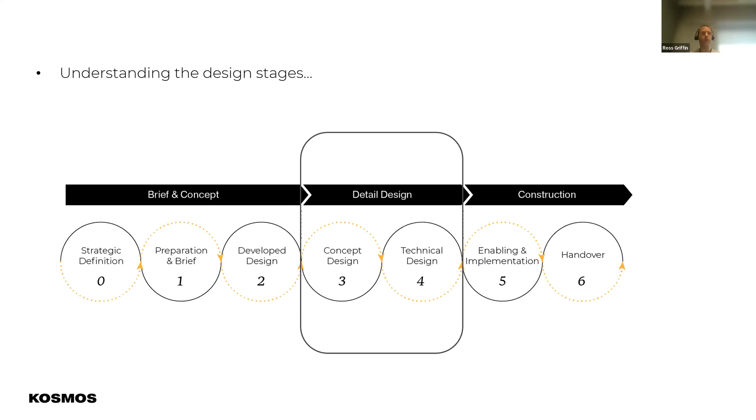So understanding the different levels of information, as we discussed last time, moving along the project life cycle, we now know that the different disciplines deliver their level of detail and level of information at different stages, even though the industry has tried to standardize that LOD 200, 300, 350 at the different stages. The reality is we just don't get that from all of the disciplines uniformly at each of those stages. It's just not possible because the design development of the project doesn't happen that way. We need to let the traditional design evolution develop itself throughout the project lifecycle.

So for us, we need to be aware of what that LOD and LOI is along the different design stages. So again, for mechanical and electrical, we'll jump into this LOD level. For different systems, it is often quite different, because a lot of the mechanical and electrical systems are functional requirements where we wouldn't actually model them, or the design team don't actually model them.

Security might be one example. You might get the location of sensors on ceiling plans, but you're not going to get cables. You might get the location of the security boxes, the fireman's box for fire safety, but they're not going to model the entire system for you.

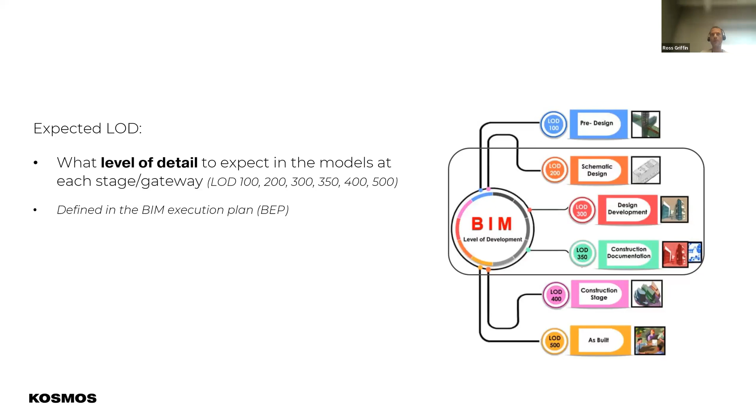You guys are the experts in that. I don't need to tell you that.

So the LOD, as we mentioned before, here we're focusing on LOD 350 purely because that's what's defined for this detailed design stage. If you ever see an LOD 400 or 500 at a design stage, generally the BIM execution plan is wrong - someone really doesn't understand what they're requiring when we talk LOD 400, 500. That's as-built stuff you'll receive from the contractor at the latter end. I'd be interested to hear if you guys have ever come across that on your projects.

In the earlier stages of the development, we've come across it all right, but it becomes pretty obvious pretty quickly that it's not achievable to develop that level of detail, or even necessary.

As parametric design and artificial intelligence come in, I think we'll be able to get this information in our models during the design stage for certain components. But again, a broad brush minimum requirement for all disciplines of an LOD 350 at the end of a detailed design stage - it's not exactly correct. We need to understand that as we develop through.

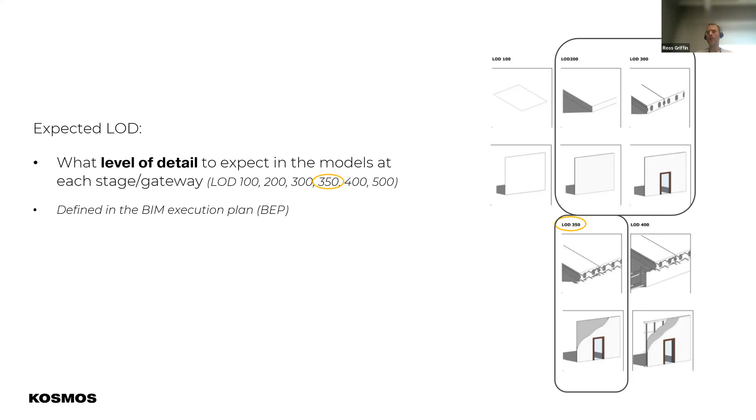And this is the challenge. When you look at all the standards in the industry, no one really explains this to you. This is something we figure out on the projects ourselves. We might understand it from the traditional design delivery model - let's not get terminology confused there, but the design development process - and we need to use those understandings in a practical sense. Like we can't expect more than is traditionally delivered.

Again, same diagram as before. We're looking at different models, unfederated for different disciplines. As we mentioned the last day, you might have a minimum of 5, or as many as 10 or even more. Here we've identified on some projects unfederated models for mechanical and electrical alone - main electrical, fire safety, hot and cold water, ventilation, cooling, foul drainage, external services, all different unfederated models, generally on major projects, more than likely industry, pharma.

You'll get specialist discipline leads developing these systems, meaning more than likely they'll be modeled separately as unfederated. Again, we'll try to understand that in the earlier stages of the project, so that for us at least it's clear what to expect.

And then from here we set up weekly, as mentioned before, or bi-weekly meetings with each of these disciplines to discuss what has been done, what's in the plan. Let's look at the models, quality of information - does the BIM execution plan make sense?

Also, what is ICMS and how do we expect to deliver our cost estimates and cost plans? Often you'll see that the engineers and architects are interested to hear that. Sometimes the structure is different in Ireland - the engineering consultants take on the responsibility for quantification of the engineering elements. I can see that changing in the future.

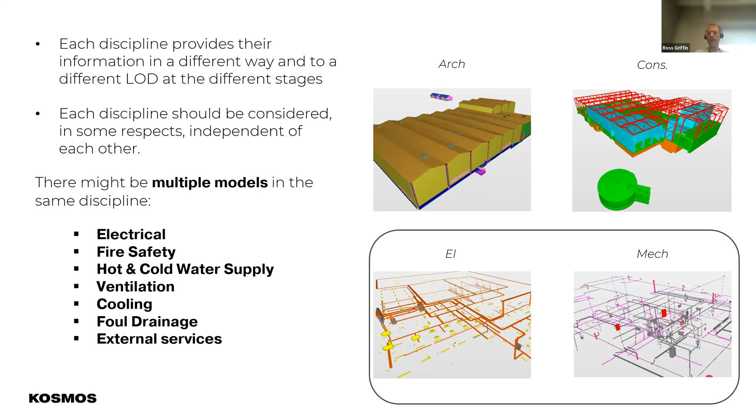And you'll be dreaming about this bloody diagram at night now, you know.

Communication - it's our responsibility to know who the modelers are, because the modelers will be different for each discipline, each organization. It's our responsibility to know who the discipline leads are for each system, so that we can communicate and integrate with those individuals, building that relationship and camaraderie for the project. And of course, the communication flow between disciplines.

In terms of communication, something we haven't mentioned before, and it's not really related to our quantification process, but it's related to the communication between disciplines. And we would expect as QSs to be invited to that communication flow.

If Revit is being used by all disciplines, often you will see that it's BIM 360, Autodesk's cloud-based solution, that is used. There are other platforms out there like Plannerly, for example, that help with setting up the minimum standards in terms of the BIM execution plan management and delivery.

Some of these platforms are super good for setting that baseline of understanding and then managing and developing the design towards that. We as QSs want to be in that conversation. That's not just a design communication flow, that's also a communication flow for us.

So when we're assessing models within CostX or Cubit or whatever, and we see mistakes and errors, rather than filling out our traditional RFI list on Excel, or requests for information, we would open up an issue in one of these platforms like BIM 360 and/or Plannerly and raise that with a particular discipline.

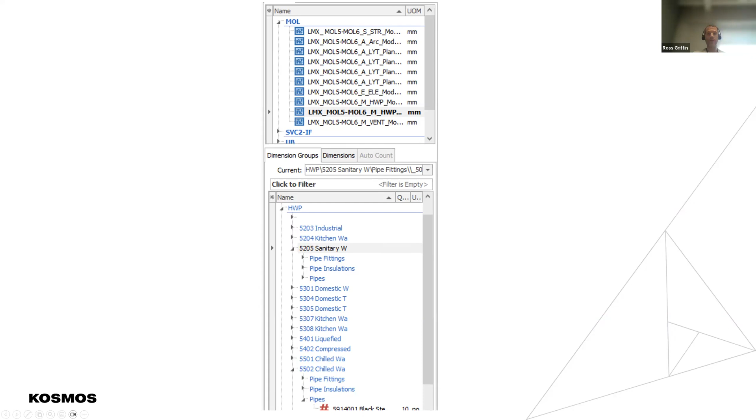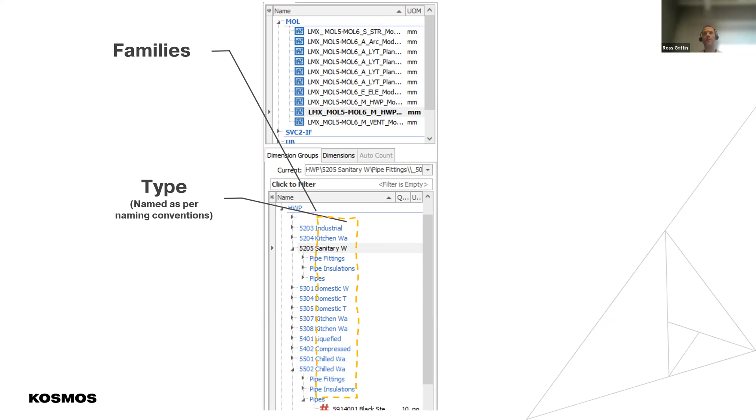You can, of course, go into more detail in the models, but that will depend on what we're looking for. So families from Revit - this is the type in terms of what we're talking about. Reference codes, again, more than likely Uniclass if it's in Ireland and the UK, going forward.

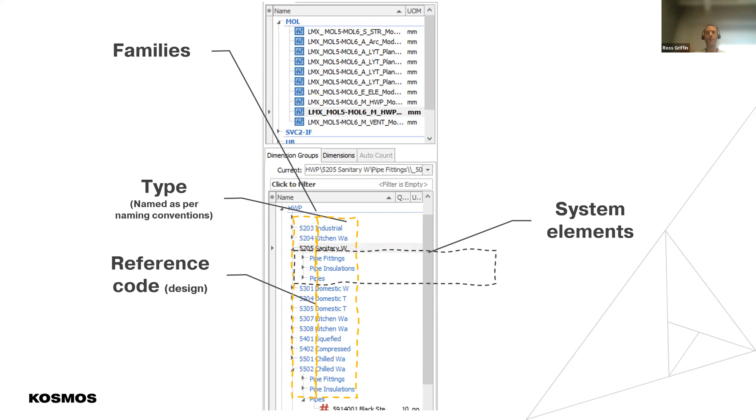There are many different coding structures out there depending on the country, location, and jurisdiction, but the process and principle are the same. On this particular project, we required that the design teams broke the project down into systems, because that's the only way we can understand the total cost of a system, and the only way we can use it for benchmarking in the future. ICMS also requires it, so we'll come to that a little later.

This is just an example using CostX, but you could be using Solibri or Navisworks, it doesn't really matter, the principle is the same. What we're doing is clicking on a system here on the left, and on the right that system is shown. All components, all the children underneath that parent of industrial waste, are shown in the model.

If it wasn't system-based, we would be clicking on pipes or pipe fittings, for example, and it would show all pipe fittings for the entire project, not just the system. This is where systems become important, because we need to know the cost per system, but the modelers don't need to model it that way. I think this is probably the key takeaway for us.

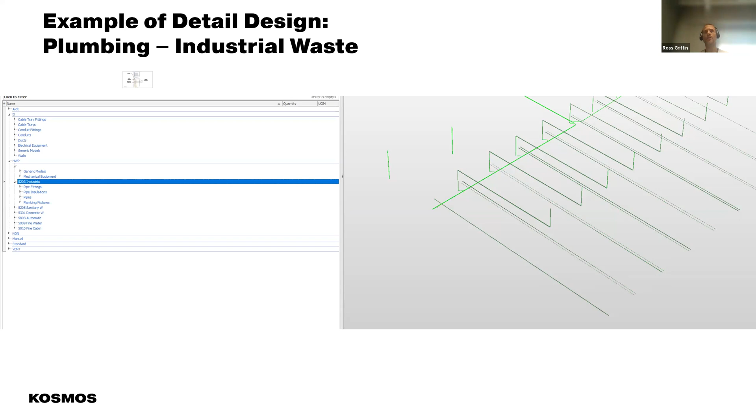When it comes to method of measurement, heights of hangers, all of that stuff becomes a little challenging within the models. You can pull those heights out, but the modelers will not model in that way. Likewise, the modelers will not model hangers, for example. Now with some advancements in design automation, they can model hangers, except for ventilation systems and pipes, so you can pull quantification if the method of measurement requires it. But you need to understand at the beginning how the engineer is going to model, and whether they will model hangers within your distribution elements.

Likewise, looking at sanitary systems, the same principle applies as we go through. What we're talking about here is that now, with a click of a button, we have visibility on systems. Prior to this, we were looking at 2D diagrammatic drawings, and it was virtually impossible to really understand the system. You have your horizontals, but what about all your verticals? They became challenging to understand.

Now, as I mentioned before, we can have really quick takeoff in terms of main distribution elements, main equipment, etc., from the models, with quite good accuracy, as long as we understand the modeling process and that method of measurement.

A small example here would be going to Denmark. They have two standards of modeling. One is they'll model a pipe up to the joint, and the joint, bend, angle or elbow is modeled separately. The other is they'll model right to the center line of the joint, and the bend, elbow or joint is included in the unit price of the pipe. So you have to have that conversation early with the disciplines to make sure they're modeling in the way that you will also quantify.

That might be different here in Ireland and the UK. We'd have to look into that at the beginning, and that's a conversation to be had with the engineers. Also interested to hear your opinion and experience in those matters.

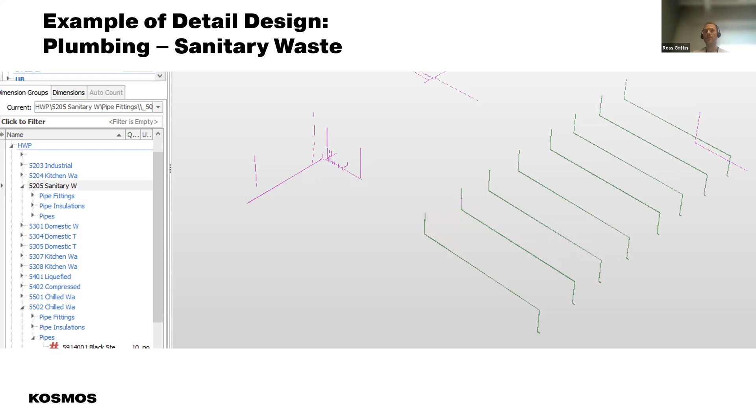Plumbing distribution - of course, the larger the projects, the more complex they are. This is where I absolutely believe that MEP modeling services comes into its own in terms of very quick quantification. You can see it all the way down the left-hand side, relating to the different systems, whether it's industrial pipework, sanitary, domestic water, etc. So we can really begin to isolate these systems and pull data. This is quite a large manufacturing facility, as in this example at the moment.

And then, of course, we have identified in the naming convention the coding number related to whatever coding structure you're using, whether it's Uniclass or what have you, along with the pipe material, pipe size, and system. You get quite a lot of information quickly from the models, as long as the engineers are modeling in that way, all to be defined in the BIM execution plan at the beginning.

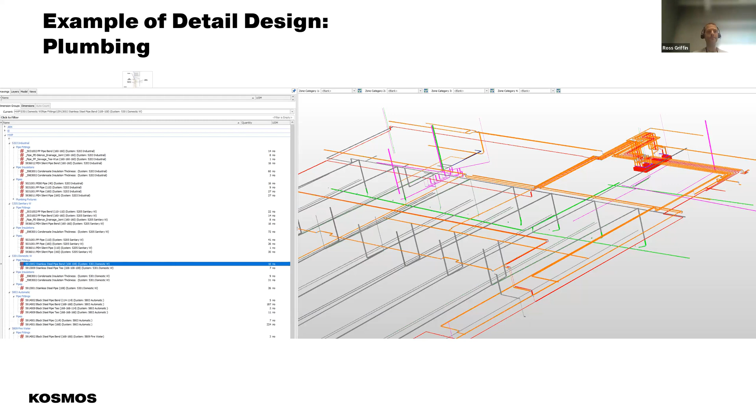Just an example then of ventilation, different approaches to ventilation. We like to look at each individual ventilation system, so that every system under an AHU unit, depending on the number of AHUs you have on your particular project, will give us a very clear understanding in terms of benchmarking and metrics for cubic meter of air exchange per hour per system when we get these prices back from the marketplace.

Another approach is in the method of measurements, where you price each mechanical unit separately, and all your ducting is included for all systems. We'll look at that a little bit later, but we like to look at it system-based here, and the modelers can do that. It's not a lot of additional work for them, because they're modeling each component anyway - they're just allocating it to a system type, and we need to try and define that process at the beginning of the project.

So again, what you're seeing here is on the plumbing element. It's system based, very similar pipes, different pipe materials and sizes used across systems, so they'll be using the same component but just in different systems.

For mechanical here, and the ventilation principles are the same, whether it's a rectangular duct or a round duct. Those material types or component types are shared across different systems. So from a modeling perspective, I think it's not an issue to break these out, just allocating the system.

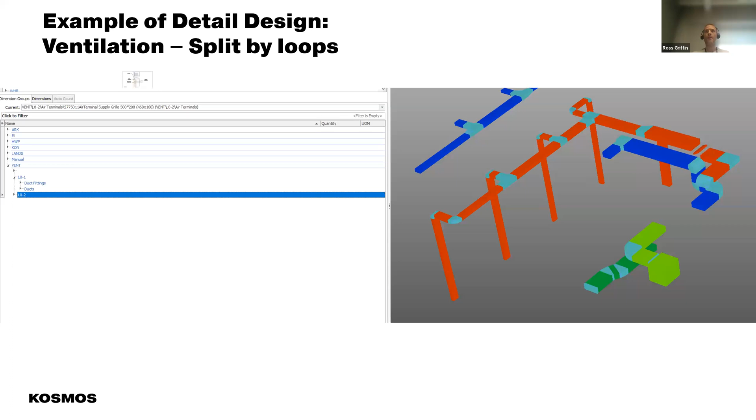And then the electrical. The electrical can vary, I would say, depending on complexity of the project typology you're working on. If it's high-end pharmaceutical manufacturing, you're going to get a lot of electrical cables because they're high voltage, bus bars, etc. For lower complexity buildings - offices, hotels, residential - you're not going to get as much of that modeled. But here you're looking at cable trays, busways, and switchboard units, etc. modeled in the electrical.

And a lot of the secondary fixing will also be modeled, the likes of switches, as I mentioned earlier on, security sensors, fire alarm sensors, sockets, etc. You can actually see down here on the left-hand side what we're looking at. We're currently looking at conduits under the routing, and later along you can see electrical equipment and fixtures and devices, lighting devices, etc. All of that will be modeled, but of course we need to verify the quality of those models.

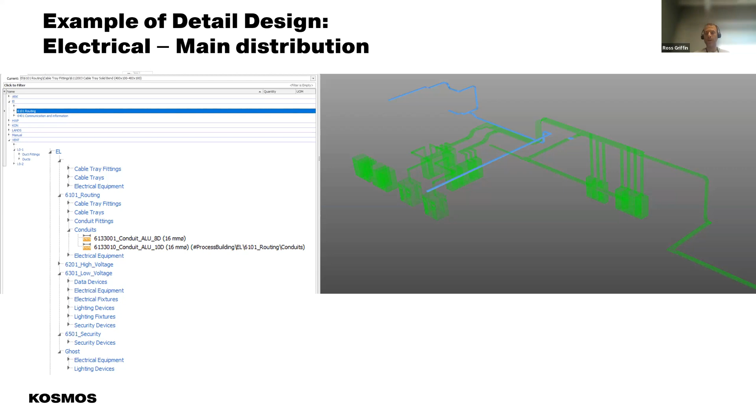Something like in all models, we're going to run into - well, what do we usually come across that becomes challenging for us?

Often we require or suggest that we look at certain elements, and it was the same in the architecture and construction - it's having this conversation with the discipline leads about information that's important to us. So again, drawing tags. Often the tags in the drawings are not the same as the tags in the model, or that reference code. We need to somehow link them, and there needs to be a key within the design information to link it. It can be done in Revit, and that can be embedded on the 2D drawings once they're cut. It's an important conversation to have up front, because this is something that will be challenging over time, I think.

Insulation to the pipes, also an interesting one, as we mentioned in terms of model sizes - a while back, an 850 megabyte model. Once we removed certain parameters in IFC, insulation being one of them, we were able to reduce the size of that model dramatically. And again, other areas like the generic models and caseworks - I have an example of that in a second, I have examples for each of those, of course, like last time.

External, internal - it's not covered under the coding structure used in Denmark, but Uniclass will or might. Client deliverables and underground installations. Underground installations is a bit challenging, as I mentioned the last day, well, I hope I mentioned it.

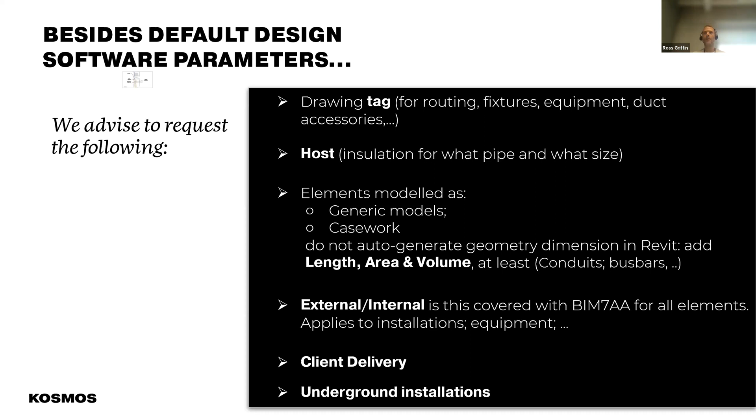So yeah, insulation for what pipe and what size - you can see here it's undefined, but we can bring it in later under our requirements. This is, again, not something we're doing - this needs to be defined within the models. We can't add information to our models if it doesn't exist in the models. That needs to be communicated with the discipline leads and the engineers on the project.

And what's interesting about this is that this is the same conversation we're going to have on every single project. It's the first one that's going to be the most difficult.

And then once we move to our next project, we'll already have the knowledge built up and these conversations already had. You're kind of rinsing and repeating as you go through each project with new stakeholders. It's always new stakeholders, we know that. If you're lucky enough to repeat a project with the same stakeholder group, client, architect, engineer, you're in a good place, because what you all learned in the previous project, you're really just implementing. Some of these conversations you don't even need to have again.

But our experience is that the discipline leads change regardless of whether it's the same stakeholder groups, even on a repeat project. The discipline leads change, the modelers change, people move around the organization. So standardization in communication is ideal, because as the QS you're just pulling that go-to pack and saying, this is what we're doing, this is our standard approach, this is what we want to implement. Have we looked at this? We need to make sure ghosts are indicated like this, and client deliverables like that. Have we got the parameters we need for insulation on the pipes? Yes or no?

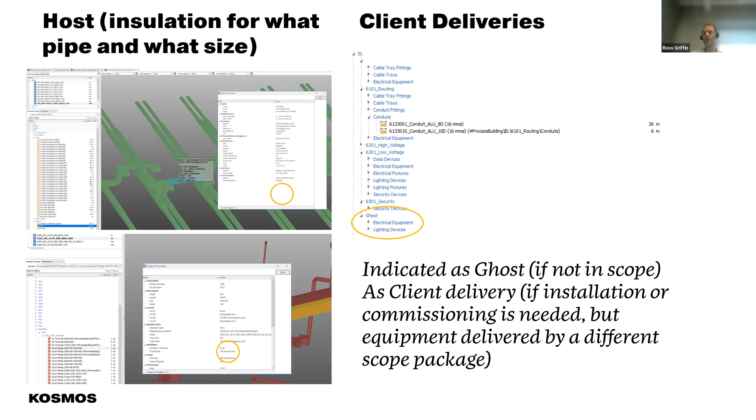So yeah, I think once those first few projects come in, it will be rinse and repeat work, the same way quantification is rinse and repeat, isn't it? There's nothing new in it. Following our method of measurement is a standard approach.

Generic models and casework. An example of a generic model would be the importation of a structural model into an architectural model - that's a generic model. We don't want to know anything about the structure in the architectural model, it's there for placement, we should never measure off that. The same principle applies when you have the architectural model in the services just for locations - we don't care about that, because that model might be out of date. We focus on the model the discipline lead gave us that's most up to date. But getting these elements and understanding them is important.

Generic models and casework come with no quantities, so there's no quantity generated by default. We'll export this from the model, but there'll be no quantity with it. They need to be added as an export parameter or a custom parameter when doing IFC. We can easily have this discussion with the modelers - they'll know what you mean when we talk about generic models and casework within Revit.

And of course we also need to be honest with them as well - maybe we don't know a lot about it, or we know something we need to ask about. As we layer on our experience and knowledge on top of it, this will become a very easy conversation for us in the future.

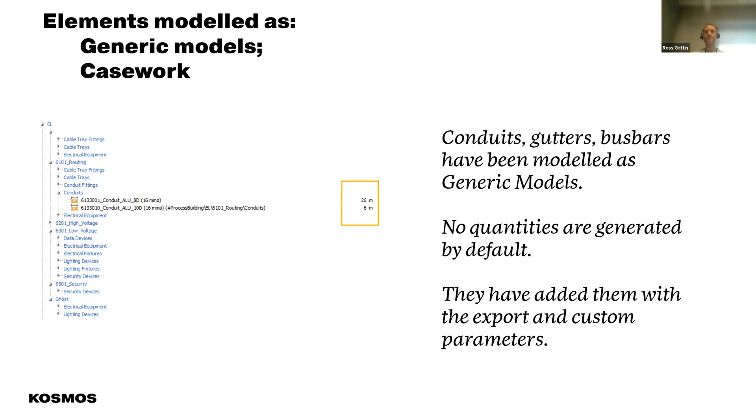Installations underground - obviously we need to measure them separately to the systems above ground. As I mentioned before, under the ground, under the building, is usually not a problem in terms of modeled information - we often get that, no problem. It's the services underground externally outside the building that are often not modeled. But it's project dependent, engineer dependent, who within the stakeholder group has responsibility and control of that. So every project in that sense will be slightly different.

So there's just some examples of the models, unfederated, the system-based structure that we really need models to be in when it comes to MEP, as well as standardizing in terms of information. So pipes and material types and what defines a different element in the model - that also needs to be discussed.

This is more uncommon, I would say, but sometimes the design disciplines might look at a pipe based on its size rather than its material type. So you might have disciplines that focus just on pipe sizes because they're only looking at clash detection, whereas we absolutely need to know whether that pipe is stainless steel, PVC, or whatever - we need to know what that material type is. So that needs to be defined early and discussed with that discipline lead, especially if the engineering practice isn't used to LOI level of information and is only used to that level of detail, which is geometric element for clash detection.

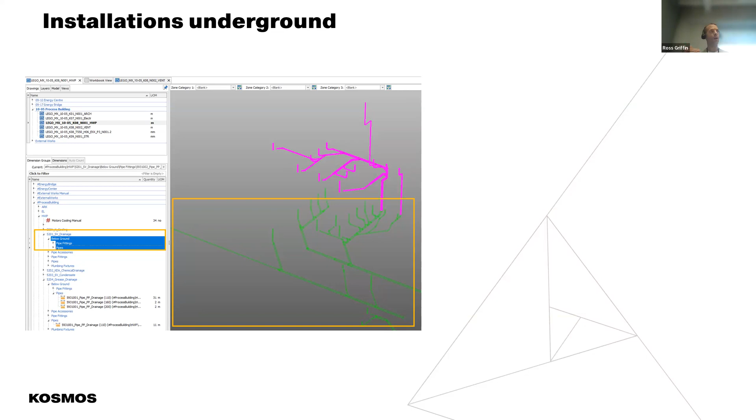So it's an important conversation to have early, so that they understand, and for them it adds a layer of quality to their design information, because they can layer in that material type automatically into their drawings and diagrams - it becomes much better quality as-design material. But nevertheless, it could very well be an awkward conversation at the beginning, especially if they don't understand why they need it.

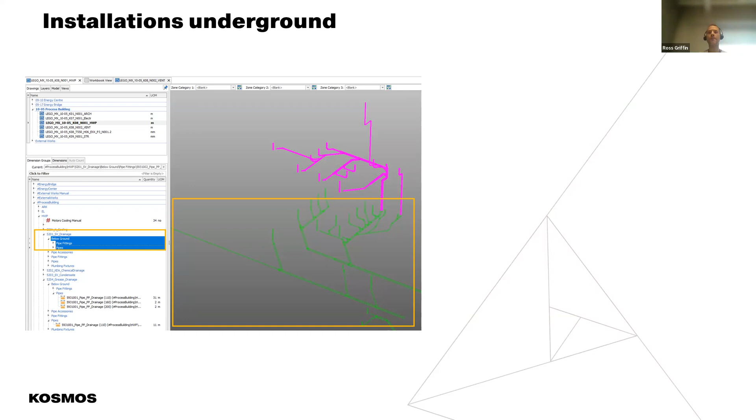So that's really it in terms of examples of the different discipline models and the structure of how models and the level of information we expect to receive. Again, it's very high level and generic. I'm trying to show you, we could really dive into the complexities of them, but I think if we apply those basic principles, we're going to get to real quality from the design information.

And so, like the last time, in relation to architecture and construction, we're not just standardizing the level of information coming from the models and processing that. We also need to standardize our cost structures internally, so that we become more data focused and more interested in how we can improve the service, not just the quality of delivery, but the service in terms of how we produce and prepare information.

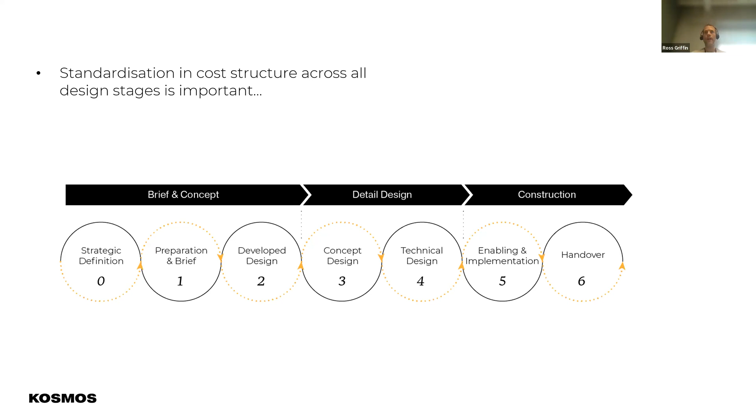You guys all know ICMS at this stage. ICMS 3 is out. Lots of standards, links within the SCSI and our previous BIM Bites sessions. But I just wanted to dive into something here in relation to the method of measurement. As we mentioned before, ICMS is just a cost breakdown structure. It is not a method of measurement. You have to look at your own jurisdiction to understand which method of measurement best suits you, whether it's ARM4 or NRM or whatever. If it's civils, it's obviously different. It really depends. But ICMS should be the skeleton that sits as the spine of your cost breakdown structure.

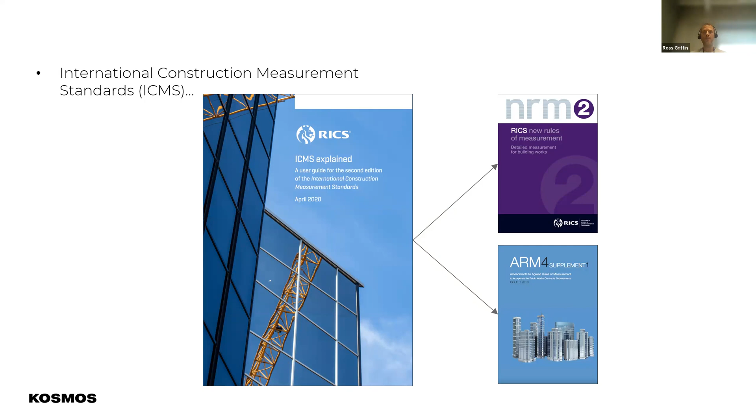But just considering mechanical and electrical for a minute, and looking at mechanical NRM2 - NRM2, in terms of the method of measurement, doesn't actually break down by system type. And please, if anybody thinks differently and I'm incorrect here, just raise your hand or get involved in the conversation. But if you look at the primary equipment, that's based on system per number. If you go down to level 3 and look at the pipework, that's based on material, finish, joints, backgrounds, etc., fixings, etc., per linear meter.

Not necessarily system based. And we would prefer, especially when it comes to ventilation, each ventilation system based on that AHU unit, that supply and return of air. We focus on a system because it gives us a very good benchmark for cubic meters per hour air exchange for each system type. And as you begin to build that, we get a very clear understanding. So systems, in my opinion, are always much better.

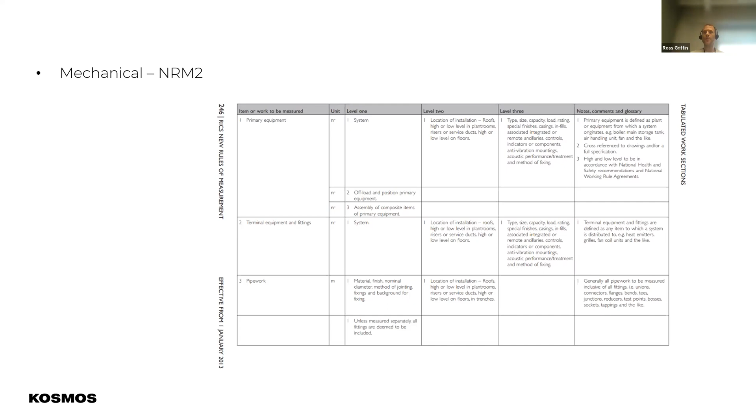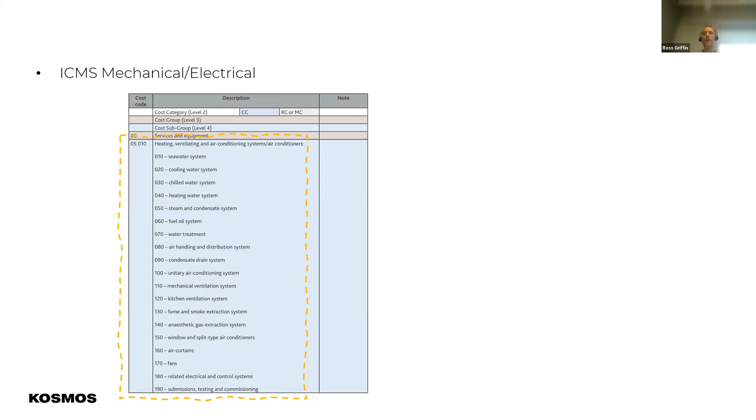Electrical, the same, system-based - kind of high voltage, low voltage, main distribution. Then you get into all the low voltage elements like security and BMS systems and internal staff paging, etc., etc. But I think we'll do a session on ICMS anyway, as part of the BIM clinic. Just to give you an idea.

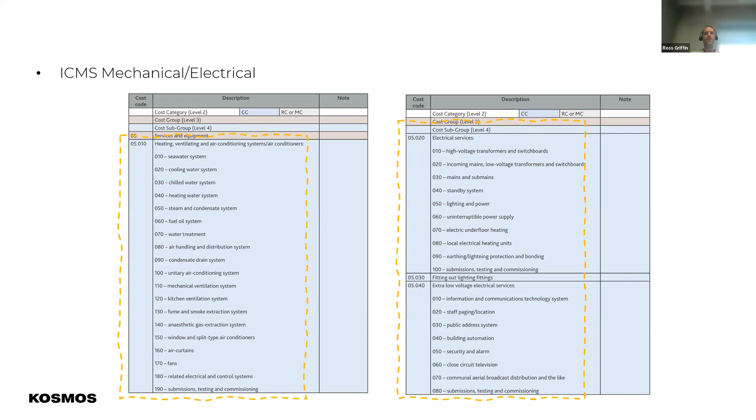And then if you look at ARM or ARM4 supplement, that is system-based when it comes to this mechanical element - system-based, slightly different to ICMS I would say. Of course, if we go back, ICMS is the cost structure. These are the systems you should absolutely be following. And then underneath that, you embed the method of measurement for the system.

So underneath your system, you have 2, 3, 4, 5, 6, 7, 8 as level 5. Underneath that, you have level 6. Underneath that, you have the different element measurements, I would say. So ICMS first, with NRM embedded underneath that as the method of measurement for each system type.

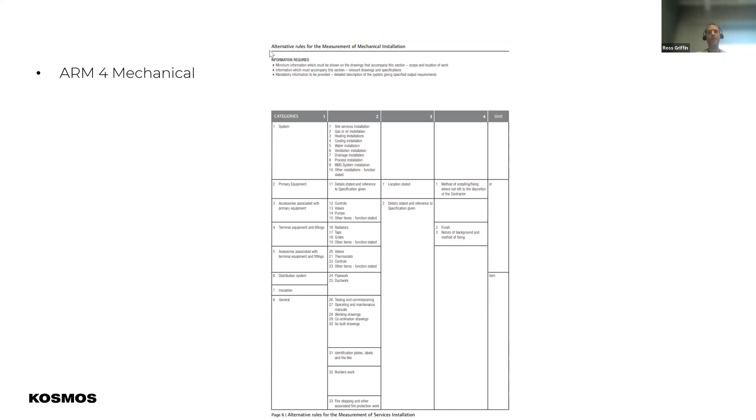We've always said from the beginning that when you start the project and develop your rough order of magnitude into cost plans and estimates at each design stage, you're building towards an end product, which is the bill of quantities. Ideally, you start with the same cost breakdown structure you intend to deliver at tender stage.

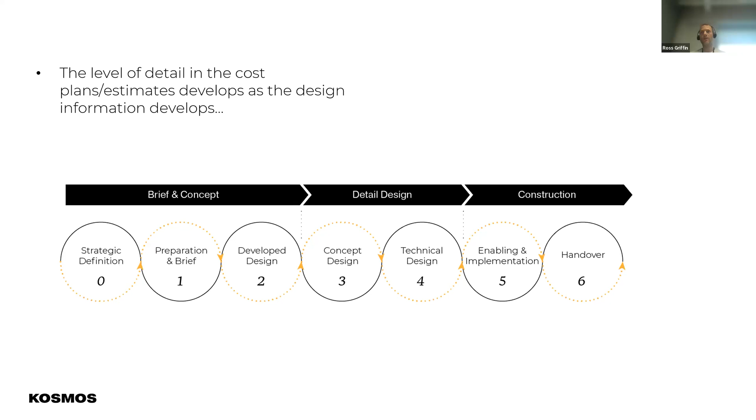You're just adding and layering in detail as it develops throughout the project life cycle. That means you're not starting from scratch at the end of detailed design to produce a BOQ. You've already done a lot of the work in relation to that structure, linking of model elements, revision and quantification of models, and communication with discipline leads.

And for the discipline leads themselves, in the BIM execution plan, what do we expect to be doing at these two stages?

Well, at schematic stage, which could be stage 3, we'd expect square meter price benchmarking for some of the systems. This might be for systems that are still a functional requirement, and quantification and unit pricing for systems that are already designed, like ventilation or electrical distribution.

And by detailed design, we'd expect that everything is quantified and unit priced in preparation for your tender estimate and bill of quantities.